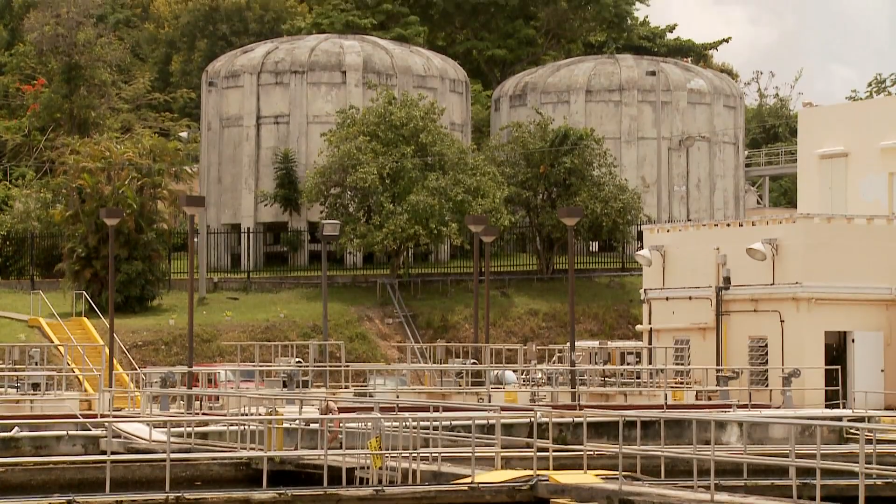Today, Puerto Rico's population is almost 4 million people, and instead of 5 cisterns in the main plaza, Puerto Ricans rely on the Puerto Rico Aqueduct and Sewer Authority to provide clean drinking water and wastewater treatment to all 5 regions of the island. With over 1,500 sites to monitor and control throughout the island and the deployment of more than 120 platforms, Puerto Rico Aqueduct and Sewer Authority is putting into operation one of the largest system platform implementations in the world.

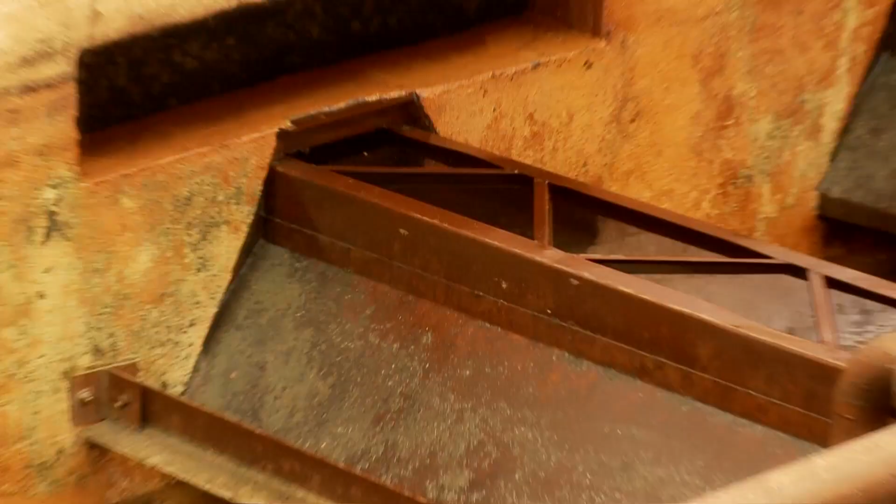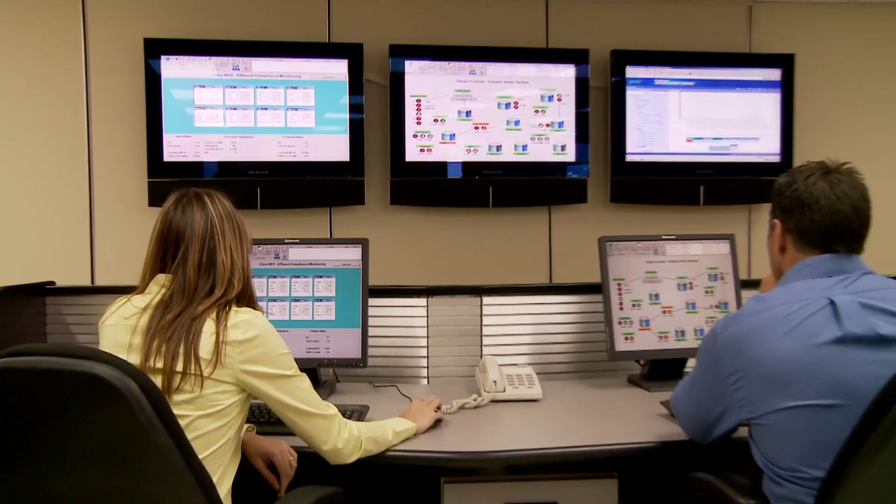By enabling the Water Authority to transition from a manual operation to a fully automated system, Wonderware has made it possible for them to improve the efficiency and effectiveness of the operations, with a state-of-the-art security system, high-speed historical data collection, and centralized system management of 100% of the critical facilities.

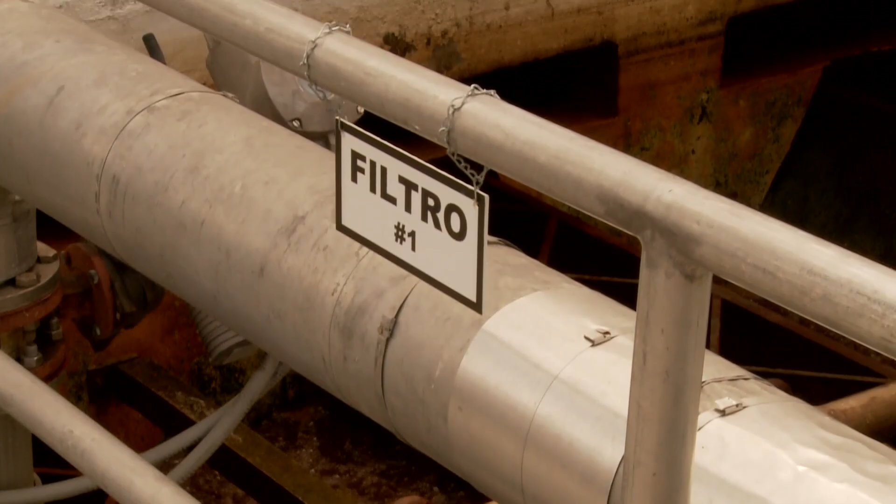The updates using Wonderware software have made this plant the role model for the metro region. First of all, because the Wonderware solution enables us to view real-time plant diagnostics. Second, it helps us improve and maintain the quality of the water produced in this facility, which is excellent. Lastly, it enables us to monitor the water treatment process and make timely changes that help prevent compliance violations.

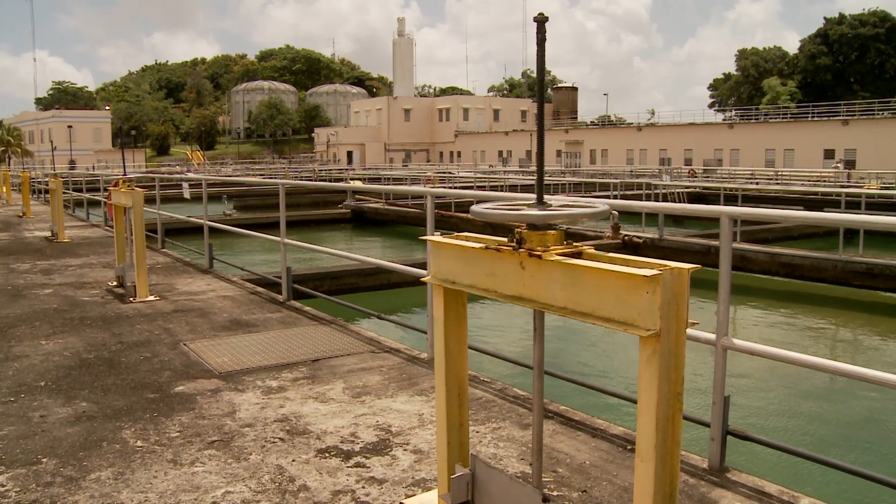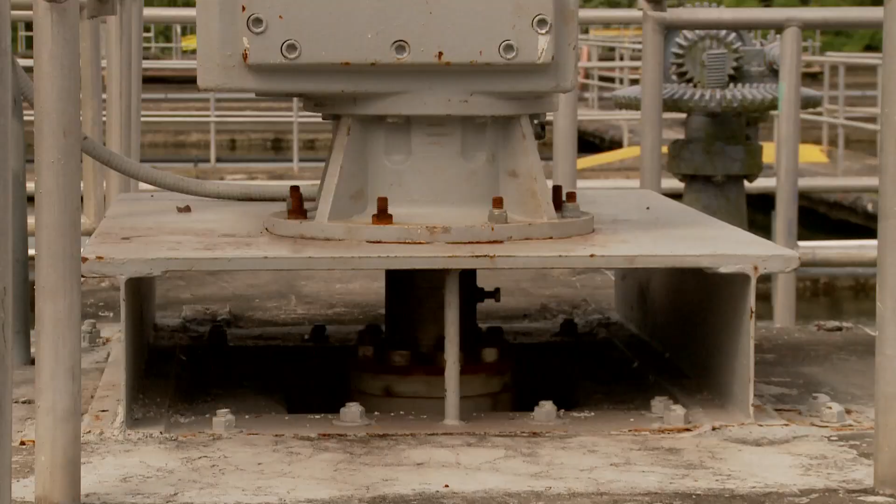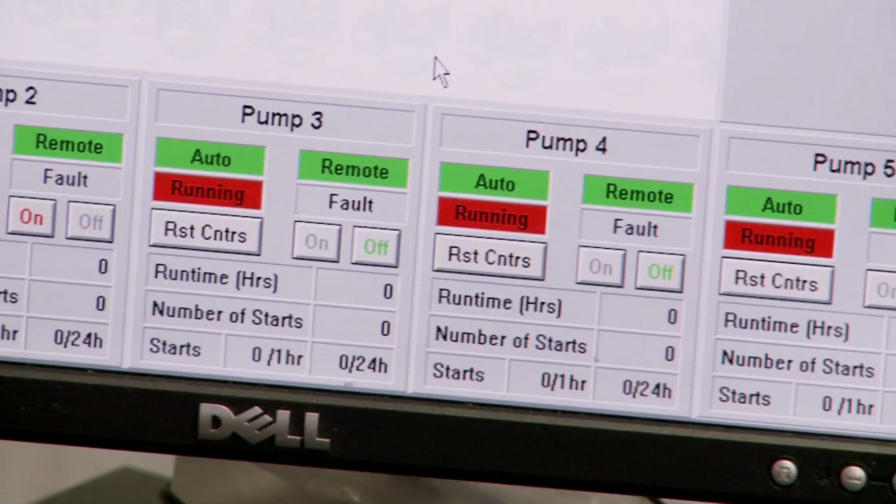Wonderware distributor IMIS understood the Water Authority's primary concerns and developed a Wonderware software solution specific to their needs. The Water Authority has changed from a reactive system to a proactive system with Wonderware systems. We have been able to detect before things happen and prevent the calls from all our users. We are able to maintain our system up without having people calling us and telling us what is going on. We actually know what's going on now, rather than having the users tell us what's going on.

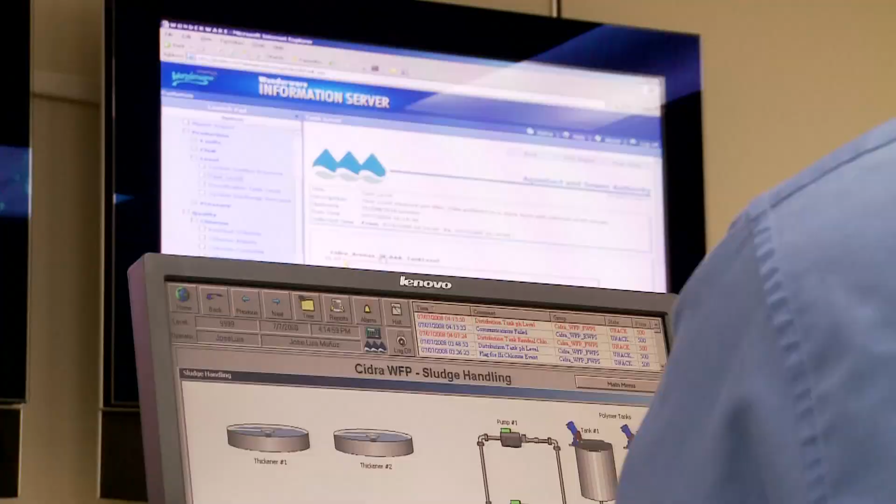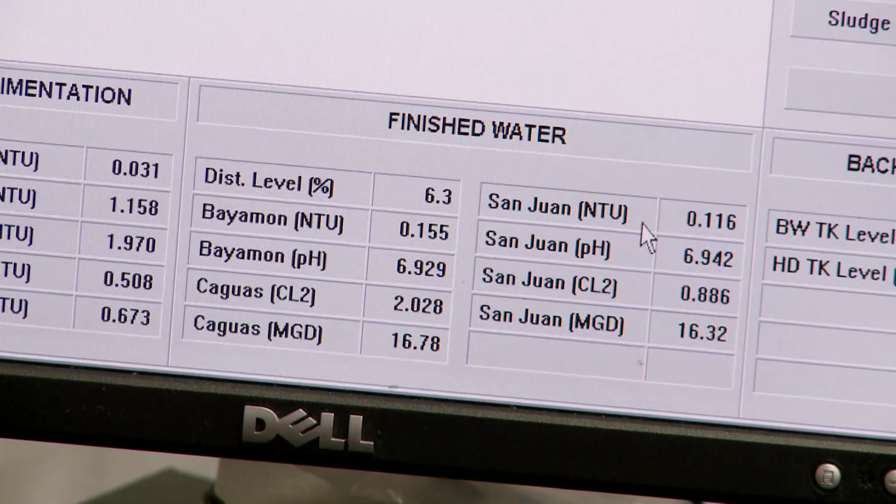By providing software solutions for real-time success, Wonderware software enables the Puerto Rico Aqueduct and Sewer Authority to access data from anywhere on the system in real time. One of the virtues of the Wonderware software is that you have the information in front of you. The information is right at your fingertips. Therefore, once you see different alarms within the interface itself, you can make decisions much more rapidly and much more efficiently, and you do not have to go directly to the facilities to get the information. You can already see the information on the screen and make decisions as efficiently and rapidly as possible.

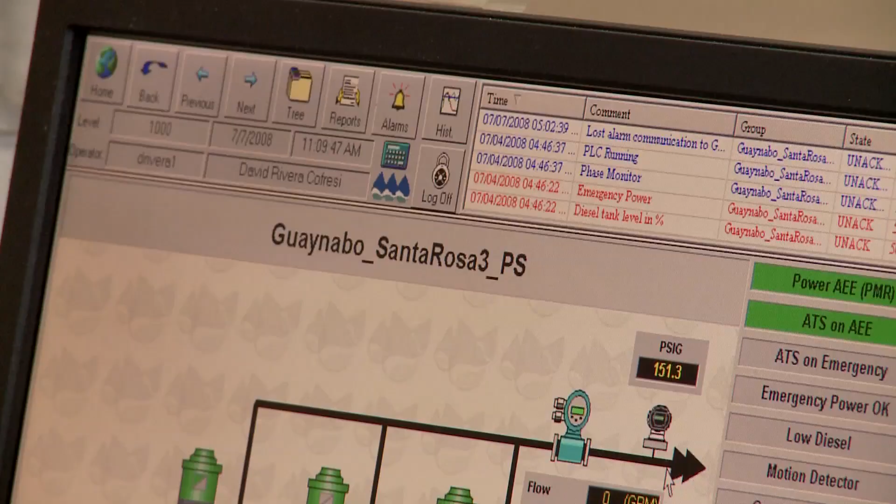Wonderware software allows us to diagnose and be more effective in solving the problems we have present at the plant. If it tells us there is high turbidity, then we need to find out what is going on. And since we have the events in the software, we can troubleshoot and move on to solve it rapidly.

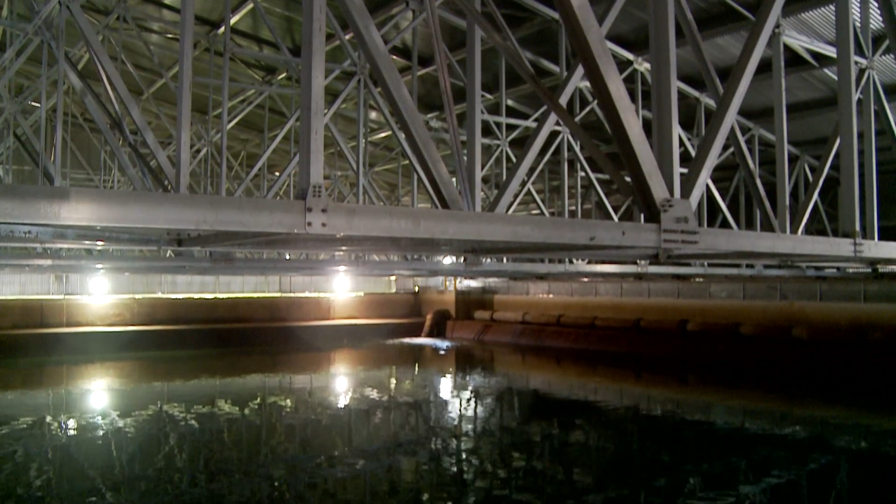Not only is the quality of the product improved, but Wonderware software has greatly increased efficiency throughout the process. They help us make operational decisions much more rapidly and efficiently, thus maximizing the resources we have while maintaining continuous operations. Using Wonderware technology, we foresee that around year 7, we will be close to $15 million in terms of savings.

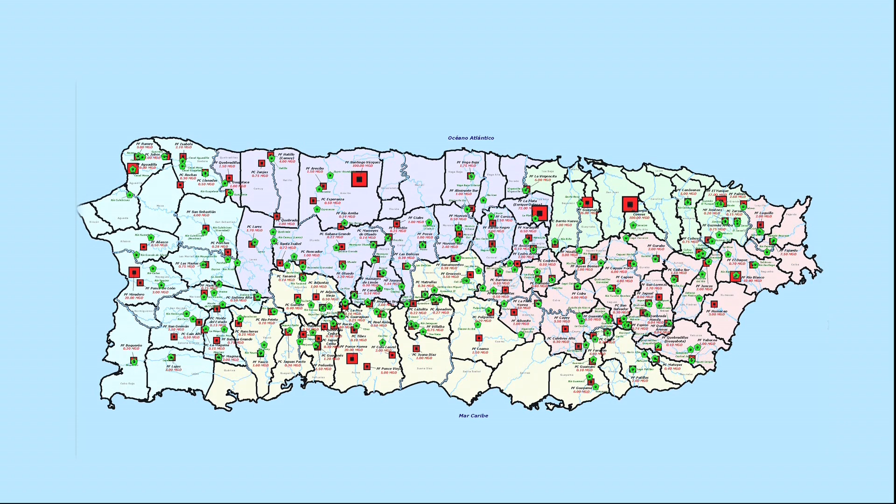Due to Puerto Rico's diverse and remote terrain, the Puerto Rico Aqueduct and Sewer Authority has implemented various technologies to communicate throughout the system, including frame relays, radios, DSL, and satellite. We decided to use satellite because most of the places are very remote, and it's very hard to get either DSL, frame relay, or radios. So satellite has been the answer to those places where it's very hard to reach.

As a result of the efficient communication throughout the entire system, the Puerto Rico Aqueduct and Sewer Authority is able to realize substantial benefits. All 5 regions of Puerto Rico have a consistent method of operating and maintaining its water and wastewater facilities. Standardization allows resources from one region to be allocated to another region. Once installed, subsequent implementations are faster to deploy. Automatic fault detection of remote PLCs, pumps, sensors, and instruments minimizes the need for manual inspection. Real-time monitoring and control prevents sewage overflows and water distribution faults.

Now that the Water Authority is a proactive organization, customer satisfaction has improved and the consistency of water quality has increased. Wonderware has definitely helped us to create the electronic tools that enable us to collect the necessary information for the monthly reports that we prepare for the EPA.

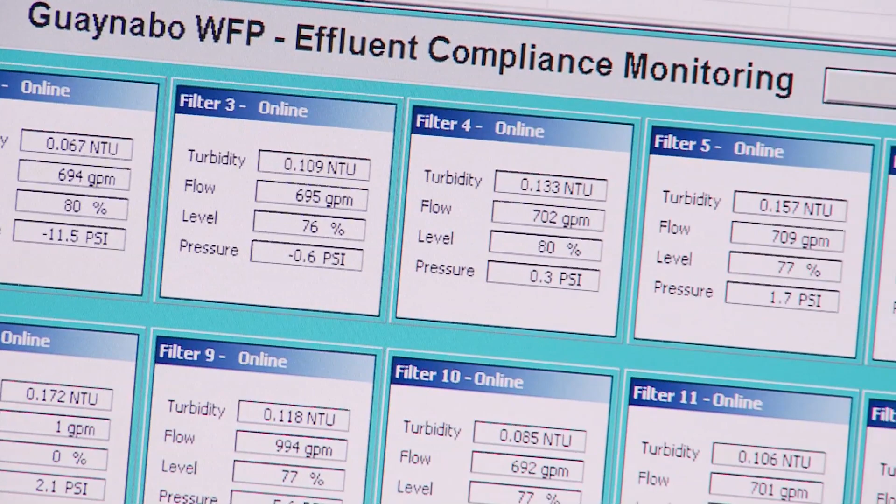Wonderware software has allowed the Puerto Rico Aqueduct and Sewer Authority facilities to increase capacity. We've used the Wonderware software to analyze our processes and capacity, and based on this data, we've realized that we can, in fact, increase our output. From 12 million gallons when I started, we now produce from 20 to 30 million in 2008, and that is excellent.

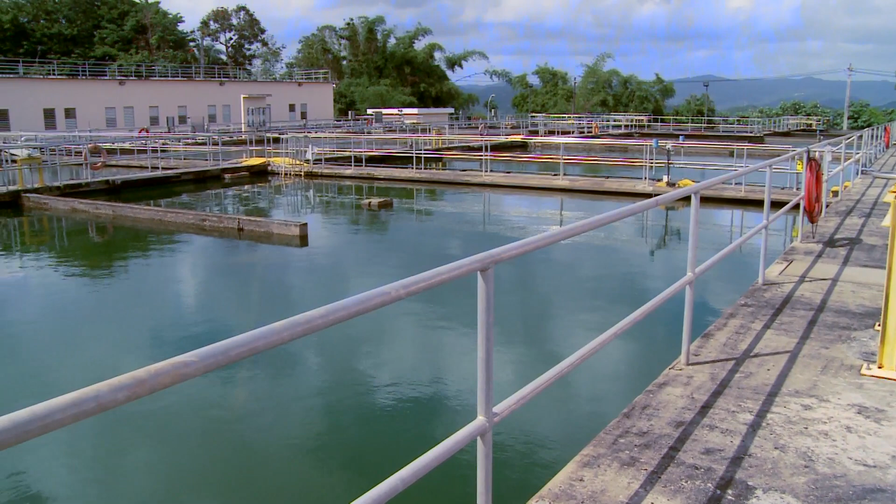By providing access to real-time information, Wonderware software enabled the Puerto Rico Aqueduct and Sewer Authority to develop a simple, elegant solution for the island of Puerto Rico. Fresh, clean water flows in a tropical paradise with a little help from Wonderware.